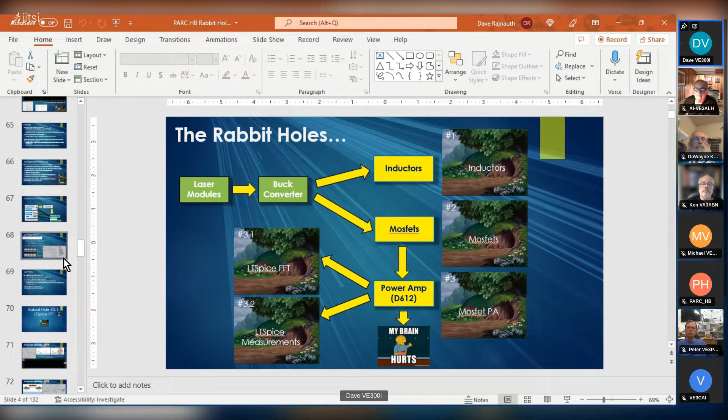So today we're going to talk about FFTs, how to do an FFT in LT Spice. Where am I here? I know I could put this into presentation mode, but I find this easier, especially since sometimes I'll be jumping around from slide to slide. This way I can see my thumbnails, and I think it's big enough everyone can see it. So this presentation is about FFTs and LT Spice, but there's also a little bit of background about FFTs. And by the end of this, your brain is going to hurt.

So just again about the buck converter. I looked at the buck converter and couldn't get it to work. Here was a design I ran across. I couldn't get it to work, and I went down the rabbit hole of trying to understand how an inductor works and why a MOSFET doesn't work, and what that eventually led me to was this thing called a high side bootstrap circuit, and that's necessary to turn on a MOSFET in a high side switch, which is what we've got here.

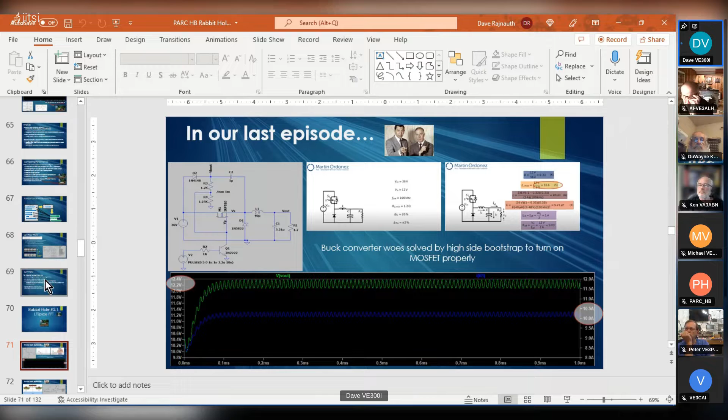And once I figured that out, the current and voltage came out exactly what was predicted here. So everyone was happy. But to get that to happen, I had to look at MOSFETs and how they work and why the MOSFET wasn't working properly. And that rabbit hole led me to understand that there's a lot of capacitance involved in these MOSFETs. And I created a little model of a MOSFET here based on the capacitances just to measure the input impedance.

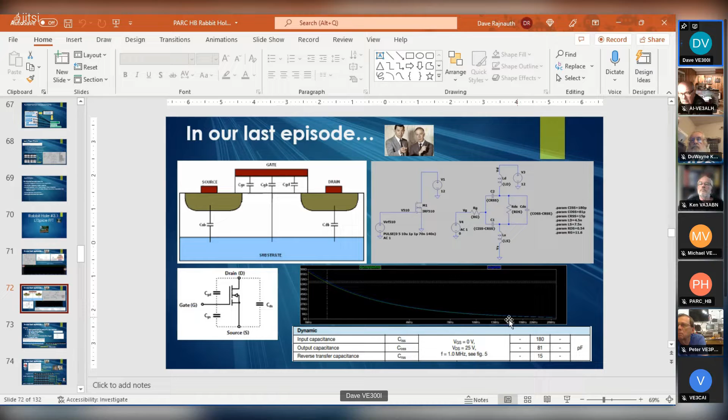So here's an LT Spice model for the IRF510. I created this based on parameters here for the IRF510, and they match exactly. And as you can see, at high frequencies these MOSFETs basically short out. So with that in mind, I started looking at my Dueling 612 because I thought, okay, maybe that MOSFET I've got is horrible. Maybe I should get another MOSFET. So in the last presentation, I started looking at other amplifiers and other MOSFETs.

And there was a mistake made in that presentation, and it had to do with the use of log versus log10. I found out that in LT Spice, log refers to the natural logarithm. It's log base e. So it's based on e to the x, and you need to use log10. So in my measurements, I used the natural logarithm, and so all my measurements were off by a factor of 2.3. It's a math thing. Just don't question it. It's off by 2.3.

And so in the last presentation I did, I talked about my Dueling 612 power amp, and I took a look at that. And one of the problems was it wasn't legal. According to Canadian regulations, for a 5-watt emission you have to be about 43.5, and 10 watts is 44 dBc. I call it dBc, it's dB carrier. That's the emission from the carrier. It's actually fundamental. So whenever I say dBc, I mean fundamental.

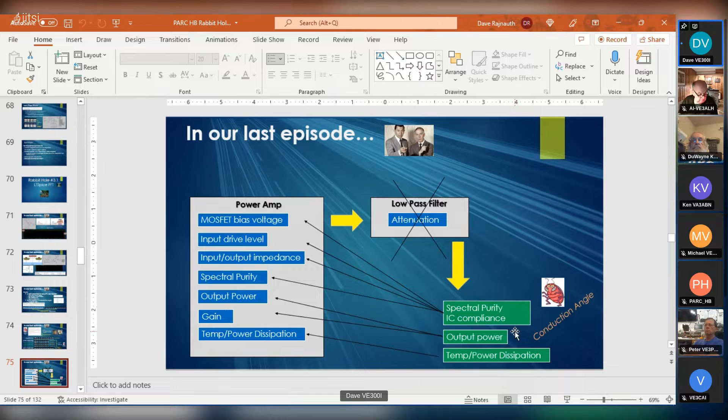So that was just a sort of background of how we got here. This evening, what I want to do is give a little bit of background about the Fourier transform, talk a little bit about what a continuous, discrete, and fast Fourier transform is, then talk about some important parameters for FFT, which become very important when you look at doing an LT Spice FFT or even doing an FFT in your scope.

Now, in the case of a spectrum analyzer, that's all done for you in the background, and you could just turn this off. If you're just using a spectrum analyzer, all this stuff is done for you in the background, and you never need to know anything here about discrete and continuous.

But I'll advise you right now, some of your brains are going to hurt by the end of this conversation. And you may not get it depending on your understanding of math and integrals and summations and that kind of stuff. But that's okay. You don't need to get the math. I'm going to try and explain it without using math, and hopefully you gain a high level understanding. So what's the Fourier transform?

So let's start with the Fourier expansion. So this dude way back when, by the name of Fourier, don't ask me what his first name is, came up with this and he said, okay, any continuous function, and a continuous function is like an equation. So it's a blackboard equation. You're going to write the equation out on the blackboard, and you've got an equation which describes one of these things. So you've got some equation called f of t. It's just an equation, okay?

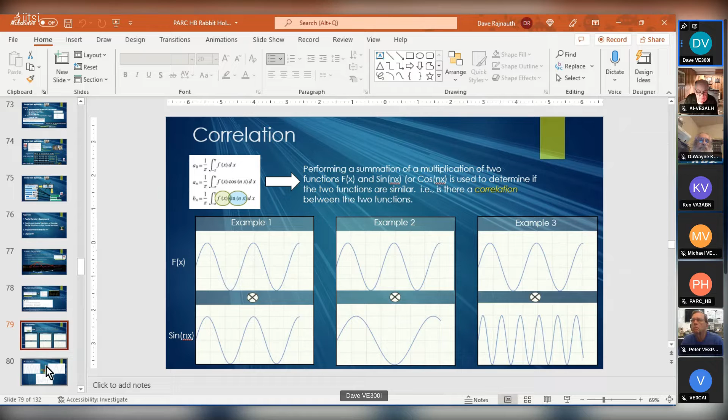Now, the reason that you've got sines and cosines here, this is important, is that if you look at a sine wave and a cosine wave, the sine wave starts at 0 and the cosine starts at 1, right? If you're looking at it on a unit circle, you're just looking at a value of 1. There's no large amplitude. There's a phase shift. So you could say the sine is a 90-degree phase shift from the cosine, or vice versa.

So if you take these 2 waves and you combine them, you'll see the resultant wave. There's a phase shift here compared to this waveform. It's as if this waveform is shifted to the left. And this waveform here at the top, you could see it's as if this has been shifted this way. So by using sines and cosines, you could get the phase out as well. Coming out of the math, you can get the phase of your signal.

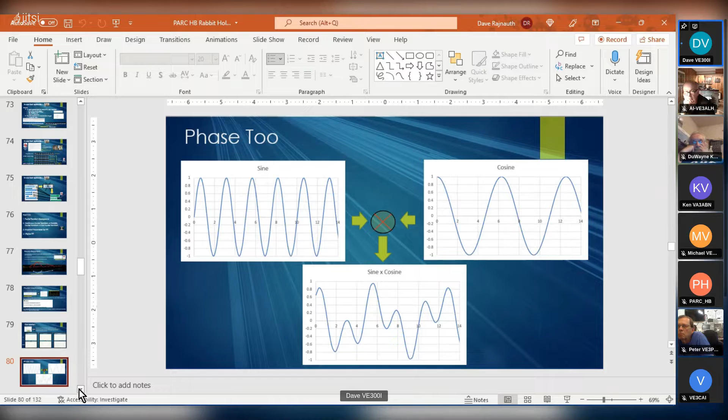Okay, so the Fourier transform basically is these coefficients, and they're telling you how much of a specific frequency is involved. For example, how much of 1 megahertz is in that signal, or how much of 13 megahertz is in the signal you're measuring. So in this case, we've got 1 frequency, a single waveform, so we've got 1 coefficient. Theoretically, it's a pure wave. There's 1 value here, and this is in the frequency domain.

So we're plotting intensity versus frequency. So n turns out to be your frequency, right? This is kind of like n equals 5, for example. This might be n equals 1, and n1 might correspond to 3 megahertz, or something. So here it's a single frequency, we've got one peak. In this case, we've got two frequencies, and so we get two peaks. We have two coefficients.

Now, typically, this analysis is done in FPGAs or high-speed processors, and they're extremely fast. But to do this kind of analysis in a computer, it takes a while. It takes a lot of computing power.

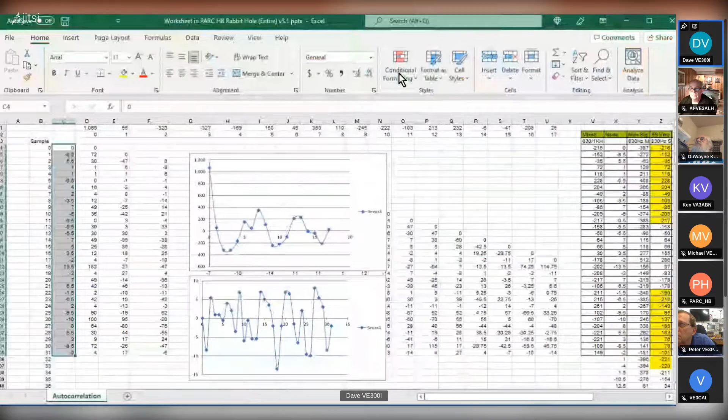And so this is the output of the correlation. You see we get a nice peak here at about 11, and that corresponds to 830 hertz. So if I run this autocorrelation in my microprocessor, in my little Arduino, and I find a peak here which is really strong, you know, it's 400,000 counts, then I know I've got a mark or a space.

We could do the same thing for an S4 1 kilohertz signal. And now the peak shifts over to about 9, right? So I knew that if I got a peak around 9, it's a 1 kilohertz signal. If I got a peak around 11, or no, 12 or so, I know that it's an 830 hertz signal. So that's kind of how correlation works. But this is called autocorrelation: you're correlating it with itself.

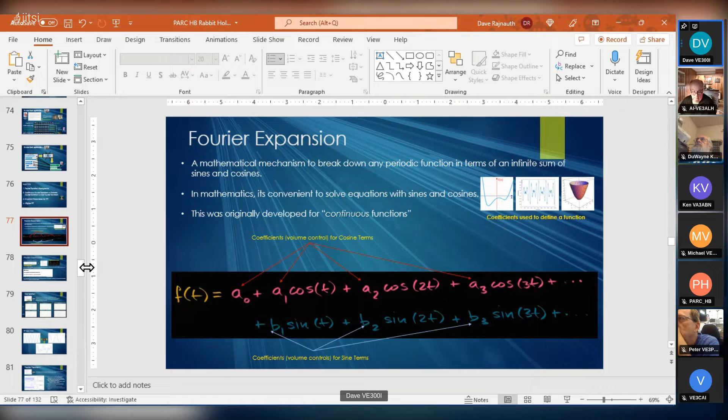Okay, so now we need to talk about continuous versus discrete, because remember back here I talked about this equation, which is based on a function, a blackboard equation, right? And that blackboard equation is continuous. But in the real world, we're seeing discrete points. We're sampling the waveform at various points and getting values, numbers coming in. This is discrete, so we can't really use the continuous Fourier transform.

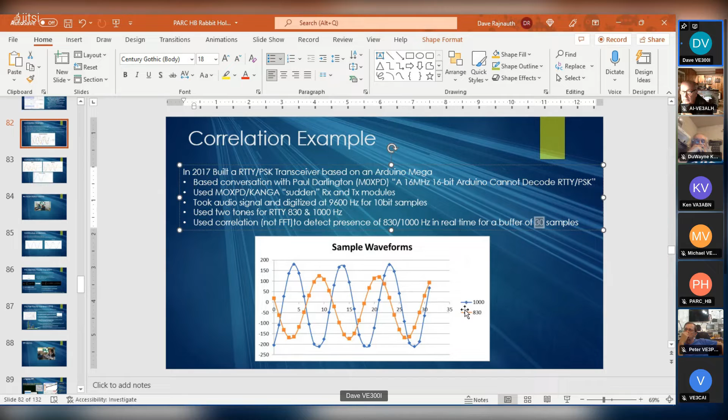Now, this is important, because if you're going to do an FFT in LT Spice, you have to understand this. For the FFT to work, the samples must be an exponent of 2. So it's got to be 4, which is 2 squared, or 8, which is 2 cubed, or 16, which is 2 to the 4th, or 2 to the 5, 2 to the 6, 2 to the 7th. It's 2 to the n. So the number of samples you enter into the Fourier transform must be an exponent of 2. If it's not, the fast Fourier transform pukes.

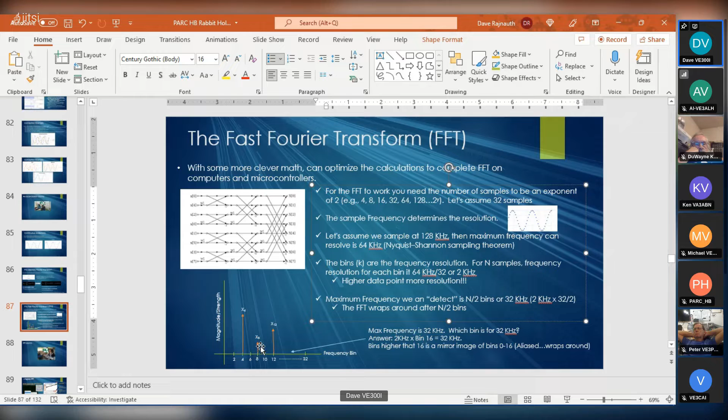The other half is just a mirror image of what we would see. So in this case, bin 4, which is our X4, if we go back to our fast Fourier transform, that's the coefficient. X4 is what the 4th bin is seeing. So this is what you would see on your spectrum analyzer or your scope. You would see a peak there. You'd see a peak at X8, at bin 8 or at bin 12 and so forth.

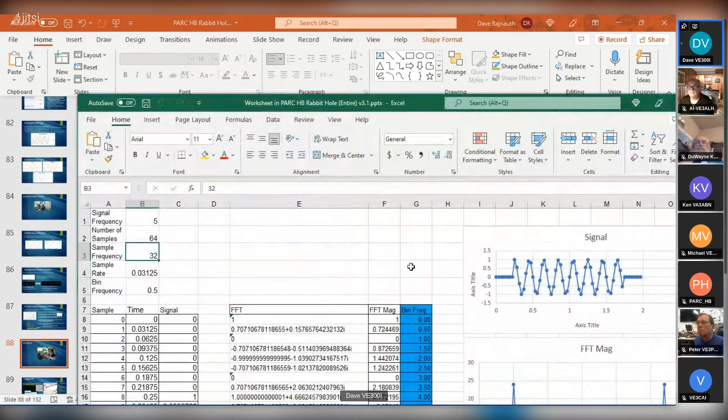Okay, so here's an example. I'll just show you this quickly so you understand what I'm saying about aliasing. So here's the spreadsheet, and I'm doing a fast Fourier transform in Excel. If you get the data analysis add-on for Excel, you could do a fast Fourier transform in Excel.

And all I'm doing here is calculating the sine based on these numbers here. So that's my frequency. That's the number of samples. So I got 64. That's my N. My sample frequency is 32. My sample rate, each bin is 0.5 hertz. So if I do an FFT, here's the signal itself, and here's my FFT.

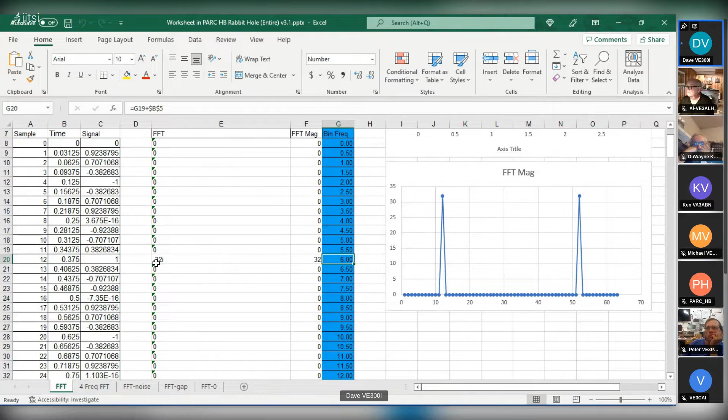Now, since I'm doing 64 at 32, it wraps around. So this portion is a mirror image of this. If you count the number of dots here and the number of dots here, it's the same. And if you go here, you'll see that at bin 12 we've got that value, the magnitude is 32. And bin 12, since each bin is 0.5 hertz, comes out to 6 hertz, or whatever you're measuring. And sure enough, that's what we're seeing here.

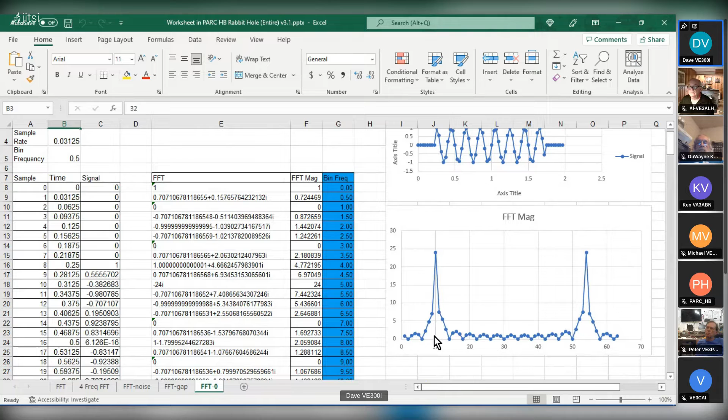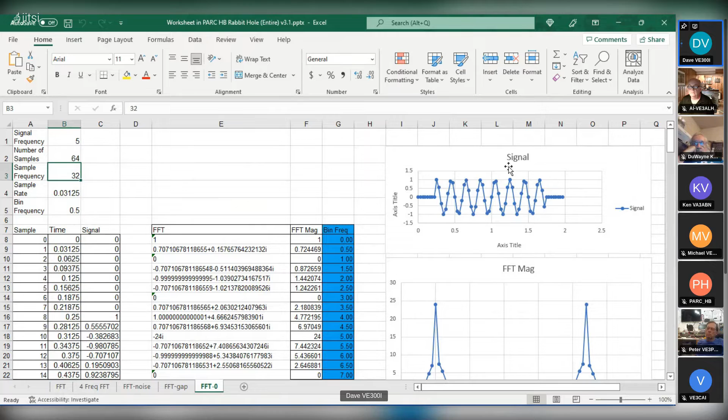Now ignore, again, after 32, that's just a mirror image. Look at here. All of a sudden now, my peak is 7 points. Huge. And that's because of the zero. And this is where you'd apply a window to get rid of these things at the start and end. Now, we're not going to be talking about windowing here, but windowing is more so for real time, where you want to take a signal and you've got some junk in the signal.

Okay, so now finally we get into talking about LTspice. Okay, so how are we doing for time?

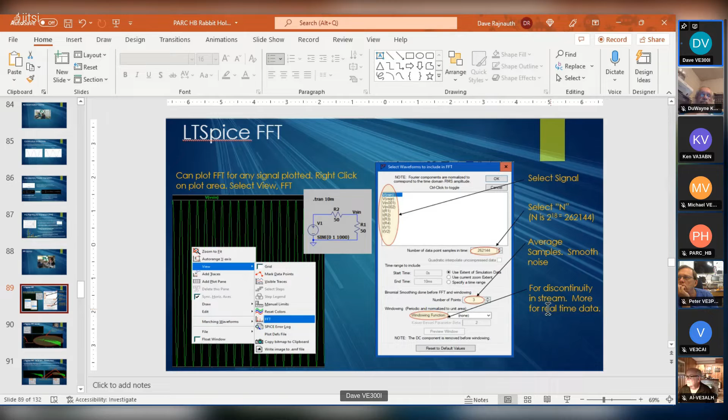Now the number of points here, it averages. So it takes 3 points and averages it, so in case you've got some noise, it kind of smooths it out. And here's your windowing function. Remember in the plot, I showed if you've got some gnarly stuff, you could window it to get rid of it. In reality, in LT Spice, I can't see you ever using a window function unless you've got some really wonky circuit. I think windowing is more so for real-time data, but someone may know better than me.

So let's look at an example. When you do an FFT in LT Spice, this is what you get as a default. You get this big, huge peak. And remember, we saw in my plot that if you've got some zeros or some bad data, you got this big, wide peak. So all of a sudden, you've got this wide peak across 1 kilohertz. It's a 1 kilohertz signal. And then you got all this crap coming out.

This should be a pure sine wave. It should only have 1 point, right? 1 kilohertz. And if you look, this crap is pretty strong. Now, yes, minus 60 or 70 dB down is low. That's pretty low down, but still, for a pure sine wave, that seems a lot. Look at all this crap. So it's like, the cat becomes angry, and it's like, what's going on here?

So this is resolution number 1. This is how you fix that. It comes to n, the value of n, right? How many sample points? Even though it's taking 262,144, I don't think it's generating that many points. So what we need to do is get it to generate more points. In the FFT I did here, I used 10 milliseconds. Now, all I do is increase that to 100 milliseconds and run the same FFT.

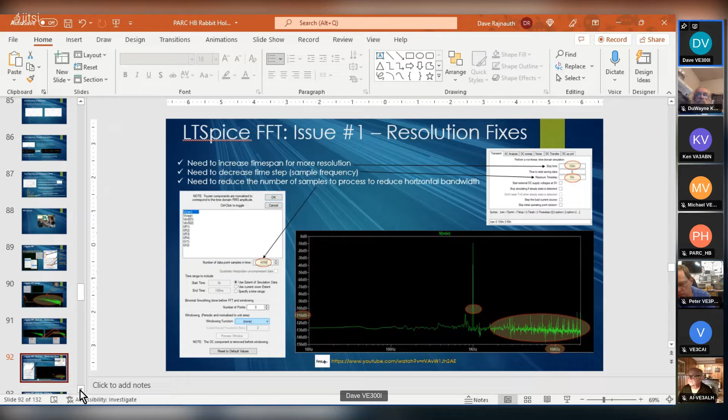Okay, so the next thing, to clean this junk up now, in LTspice there are some defaults that get set, and these defaults cause us grief. The first one is this plotwinsize, which is telling it to compress. So in the background, this is a default setting. It's saying to compress 300 data points. And when it's doing that, you're losing resolution. So one of the things you have to do is disable this compression by setting plotwinsize to 0.

The next thing is the default for the number of digits. The number of digits it's going to use is 6, which is single precision floating point. We want double precision, so we want to increase the number of digits. And it says here, if it's greater than 6, it becomes double precision. So I used 8. And so if I add those two SPICE directives, I run my transient analysis, 100 milliseconds, 50 nanosecond timesteps, and I do my FFT.

Look at this, sweet. Flat, no garbage, one nice peak, which is what I would expect. We have a happy cat.

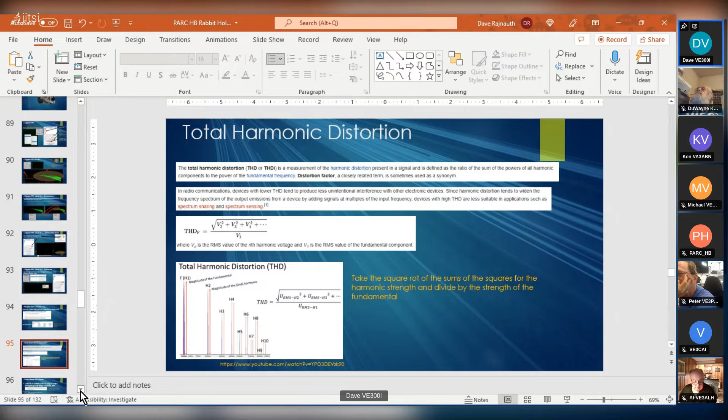So that's an important parameter for me when I'm measuring my amplifiers, because I don't have to go through and do these stupid FFTs and be measuring the peaks. I could just use this .four command. And so,

remember we said that in Canada, for 10 watts, we need to be 44 dB down from the fundamental. I'm just using dBc, right? dBc is carrier again, but it's fundamental. So we assume 44. So with a little bit of math, you solve this, you'll find the strongest harmonic has to be 0.63% of the fundamental.

So let's do a little experiment here. Let's have an LTspice circuit. We've got our fundamental, which is 1 kilohertz, magnitude 1, strength 1 volt. And here we've got a second signal, which is 3 kilohertz, which is the, what's that? Third harmonic. It's the third harmonic, right? And we set the voltage of that to 6.3 millivolts, or 0.0063 volts, right? So if we do that and we plot it, this is what we get.

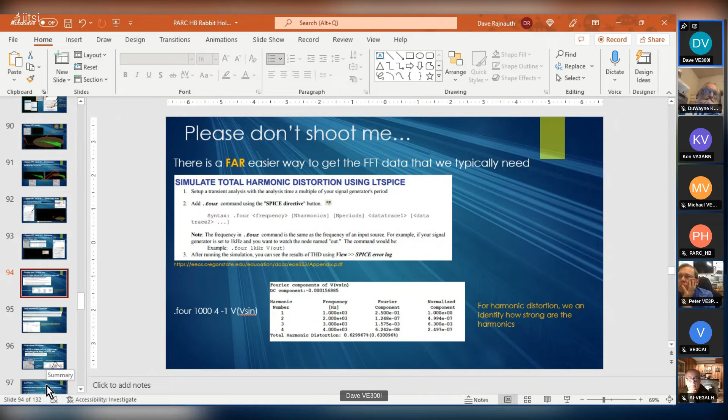And as I said, where I had it, .four 1k V(out), we add that directive there. Okay, and this is what we would arrive at. Our fundamental, that's the strength of it, the second harmonic, the third harmonic, and so forth. And if you look at the strength of it, look at the third harmonic. It comes out exactly 6.3 times 10 to the minus 3. So if we take log of that times 20, it comes out to 44, right?

And look at this. Look at the total harmonic distortion. It's coming out to 0.63%, which is what we need. So I could use this now, and I can figure out the spectral purity. I don't need to go and do all that rigmarole with LTspice. So last slide. So let me put this in a nutshell for you.

Okay, so use the Fourier transform to decompose a continuous signal. That's the blackboard, right? You use the discrete Fourier transform to decompose a sampled waveform to get the frequency components, and that's what your spectrum analyzer does, right? And use the fast Fourier transform to optimize the discrete Fourier transform to do it faster and with less math. So typically you may get that in your scope, although your scope may have an FPGA in it, I don't know. But certainly a microcontroller is going to be doing an FFT, and in LTspice it's doing an FFT.